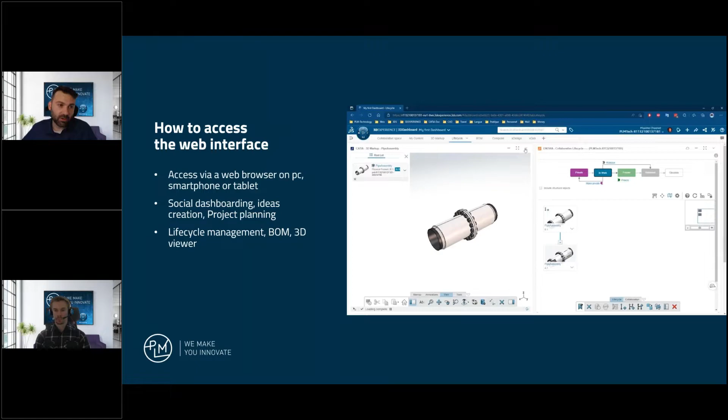Then you log onto the 3D Experience, and you can collaborate with different users using social dashboarding. It is like a blog, idea creation, task management, or project planning. But you can also review 3D models thanks to an online 3D viewer, access the bill of materials of an assembly, do some lightweight design, and also lightweight lifecycle management.

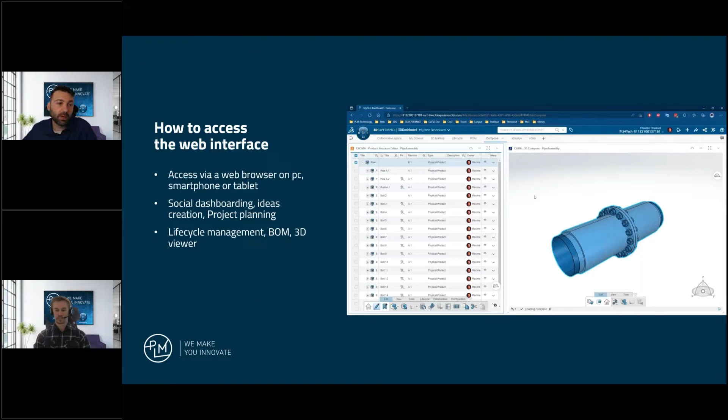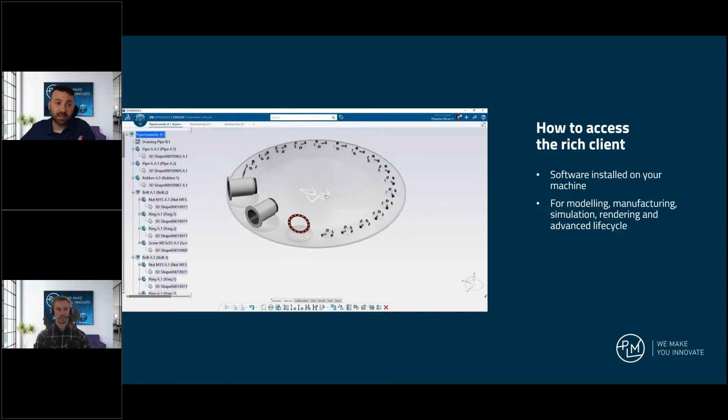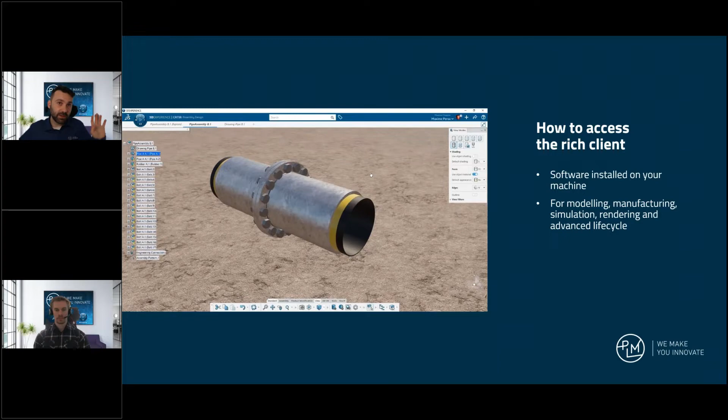However, when it comes to more advanced functionality, then you will need access to the rich client. That is the software that you will install on your machine, and then you will use it for modeling—part assembly, drafting, manufacturing or simulation using Simulia products, rendering, or advanced lifecycle management. So what is very important here to understand is that you can access it either via the web interface or the rich client, for different purposes.

Finally, you can also invite a subcontractor to the platform, and this person could provide a purchased part, a standard component, in a different collaborative space, and then you can collaborate with this person as well.

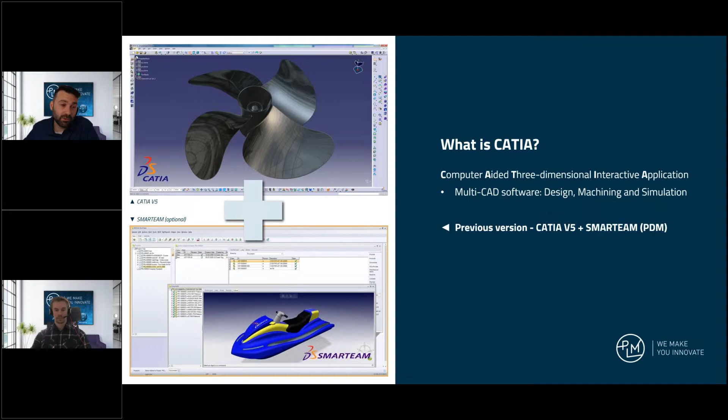And we could link it with a PDM software called SMARTEAM, which was optional but would be helpful for managing and organizing the data. However, these were two different software that you had to install and maintain.

Today, we talk about Catia 3D Experience. And as you can see from this video, the rendering graphic has been significantly improved, as well as the new interface that is a lot more intuitive.

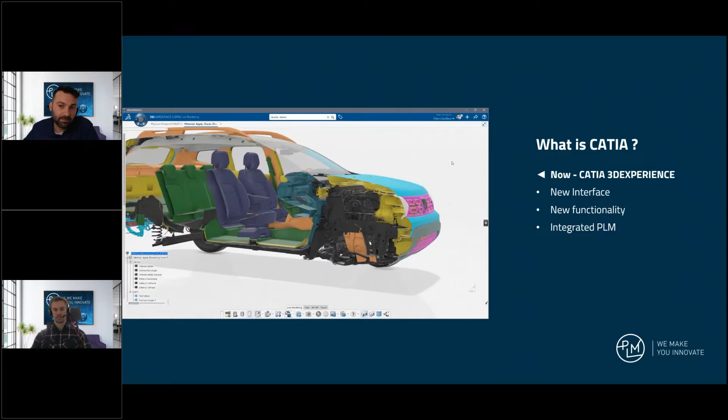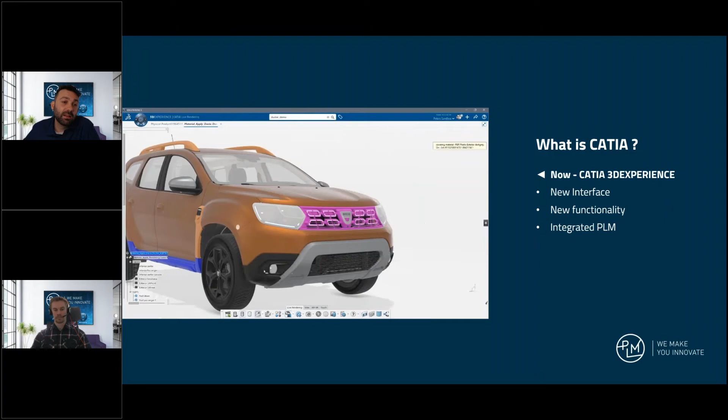There's been a lot of new functionality added to Catia 3D Experience, but I cannot mention all of them, so I will just mention two that I really like. The contextual toolbar in Part Design that allows you to design efficiently, and engineering connections in assembly design that allow you to animate mechanisms.

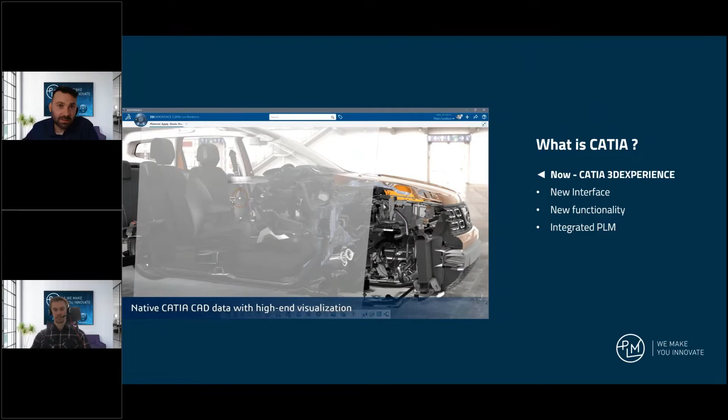But more importantly, since Catia is on the platform, it benefits from a fully integrated PLM system that brings a lot more robustness to the system when it comes to saving, modifying the status of a part, modifying the revision, and of course tracking all of these changes. So that is the very important part compared to Catia V5.

When it comes to licensing, I like to picture it as a company that has several disciplines: a project and product manager, a mechanical designer, a FEM analyst, and many more. Well, in the 3D Experience platform, it is very similar. There are roles designed for different disciplines, and each of these roles contains a bundle of applications.

For instance, let's look at mechanical designer, that is a role. It contains several applications such as Part Design, Generative Wireframe and Surface, Assembly Design, and many more. You will use these applications to work with, in that case for making mechanical parts, assemblies, drafting, etc. And obviously, if you want more applications, you can combine these roles together and therefore enhance your workflow.

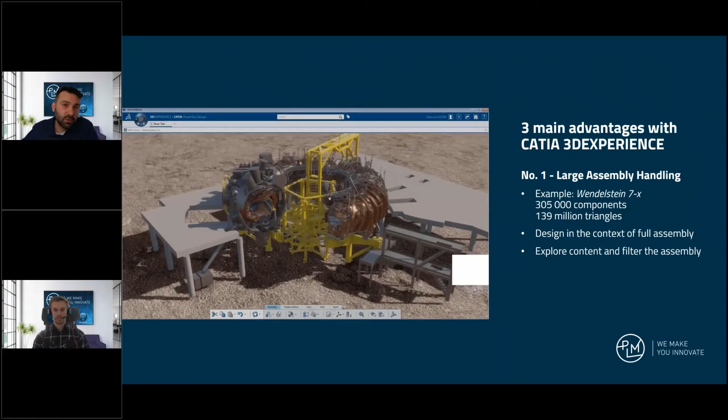Let's look at the three main advantages of Catia 3D Experience.

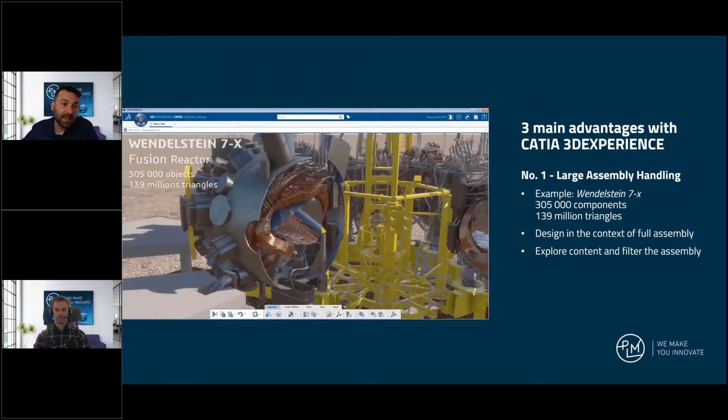The first one I want to talk about is the 3D core engine of Catia that allows you to handle really large assemblies, like this one, a nuclear plant composed of 300,000 components and 139 million triangles. As you can see from this video, there's advanced material on this component, and still it's not freezing. More important, the user can design in the context of the full assembly, meaning he can add a hole in that bracket while the assembly is fully open, and still it's not a problem. However, if you feel it's too hard to handle such a large assembly, you can use an assembly filter to minimize the area of work.

The second huge advantage of Catia 3D Experience is concurrent engineering, meaning you can finally have several users working in the same assembly at the same time. That is very important because there is no read-only mode anymore compared to Catia V5.

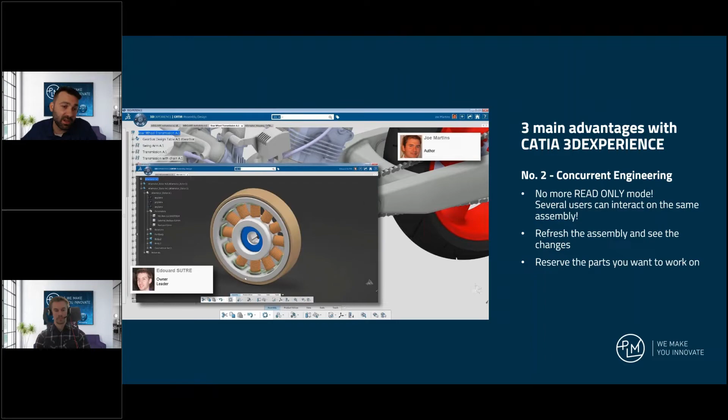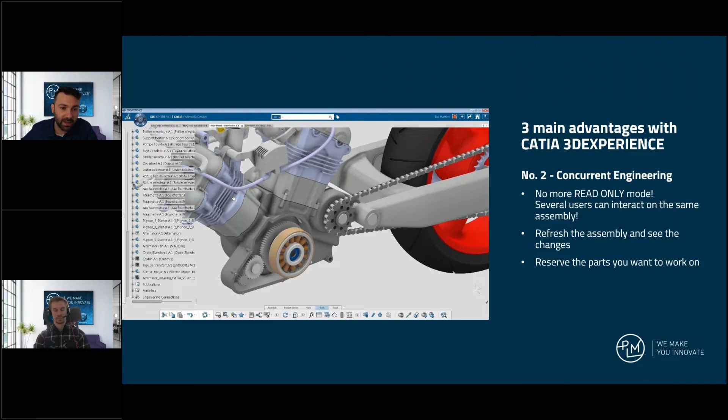In this example, I have two users logged to the same platform, but located in two different places with two different computers. User A is at the bottom and user B is on top. User B has the assembly of the motorbike already open, while user A is modifying a part that is a generator or a clutch, adding a few patterns to it, and saves it to the platform. The second user, still working in this assembly, can do a global refresh, like F5, and see that the clutch has been modified. Both of them were working in the same assembly at the same time.

Of course, to avoid conflicts between users, it's possible to reserve the part for yourself, work on it, and when you are done, unreserve it so others can open it afterward.

And finally, the last advantage of Catia 3D Experience I'm thinking of is the multi-CAD connection, meaning you can design with native Catia applications and connect other software to the platform, like Solidworks.

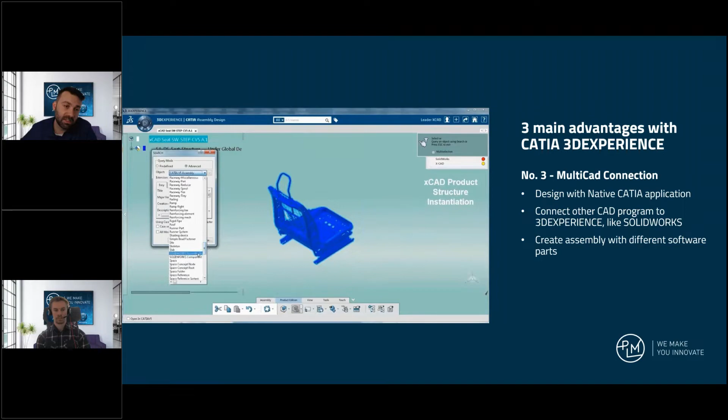In this case, we have a user creating an assembly in Catia Assembly Design in the 3D Experience platform. This will be a product in the 3D Experience, and then you can import different sub-assemblies from different software, like this one from Catia V5, compatible and shown in blue, that is the seat of a car. Then you import a second sub-assembly coming from Solidworks, shown in red, and finally another one coming from another CAD, shown in yellow.

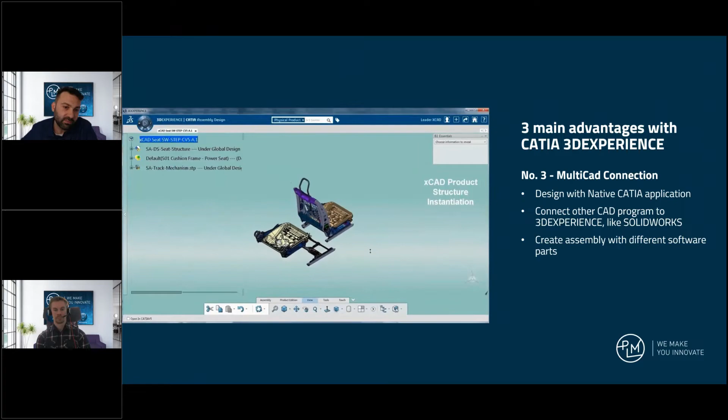What's important here is that the top assembly is made in Catia Assembly Design in the 3D Experience, and then we can use engineering connection to connect all these different parts together. At the end, when we save, everything is saved on the platform. This is very helpful when you have several software in-house and want to merge them into one platform at the end.

In conclusion, we have seen that Catia 3D Experience has a more intuitive interface, much better graphics, and more importantly, a fully integrated PLM. When it comes to licensing, it's packaged by roles for you, and for Catia, it has advanced CAD capabilities.

To sum it up, what we have seen about the 3D Experience today is that it's a social and collaborative platform. It is on cloud, meaning you can use it on any device, anytime, everywhere. Several users can connect to the platform and collaborate using collaborative spaces according to access rights. It is possible to organize the data, but more importantly, it's very easy to search the information thanks to the search bar. When it comes to licensing, it's packaged by role for you, for your discipline.

And for Catia 3D Experience, we have seen that it can handle large assemblies. We can have several users working in the same assembly at the same time, and we can connect different software to the platform.

So again, Catia is not replacing Solidworks, but it can just work with Solidworks parts.